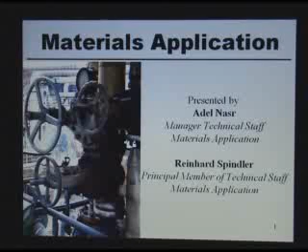Today we're going to present what we do in materials application. The presenters are myself and Reinhard, and I'm going to talk about the following subjects.

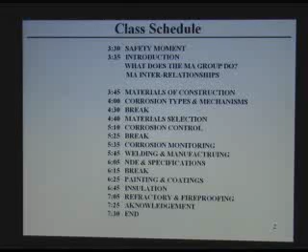The schedule of this presentation: we start with a safety moment, then introduction to what we do, our relation with other departments in the company, materials of construction, corrosion types and mechanisms, and then we take a break. After that, material selection, corrosion control, corrosion monitoring, welding manufacturing, non-destructive testing, and what specifications we prepare.

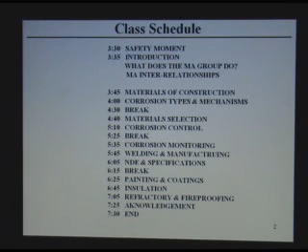Then we switch to Reinhard, and he will present painting, coating, insulation, refractory, and fireproofing. We end at 7:30.

The safety moment: this incident happened in 1984 in Chicago, one of the refineries. This was an amine absorber, a high pressure amine absorber, commissioned in 1970. From 1970 to '74, they noticed...

...hydrogen blistering in this course of the vessel, and then they decided to replace it. The section was replaced at that time and put back in service, but they didn't do any heat treatment, just welded it back to the other sections.

Subsequently they did several inspections but didn't notice anything. In 1984, about 10 years afterwards, they noticed a little hissing leak. They tried to approach the vessel, and soon after, the top section propelled and flew about 1 kilometer, 0.6 miles from that spot, and 17 people were killed because of this incident.

Investigation of this incident indicated that cracking had happened adjacent to the welding that was done, and it was very hard welds. The cause of failure was determined to be hydrogen-induced cracking. This created a lot of scare all over the world, and refineries paid a lot of attention to this mechanism of corrosion and what to do about it.

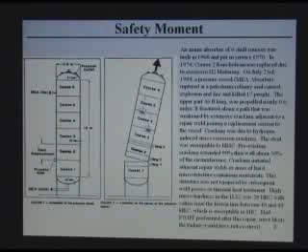Since then, a lot of development and knowledge has happened that helped industry avoid such incidents. The main point of this safety moment is that had this been done properly, if they knew that, this incident wouldn't have happened, and these 17 people would not have been killed. That is the main point of this safety moment.

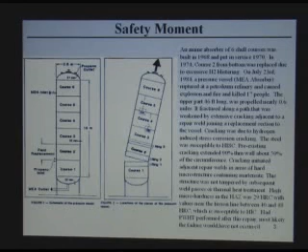Next item: what we do in our group is material selection, corrosion prevention and monitoring with different methods I'm going to talk about. We do welding control on specifications and manufacturing, dealing with vendors on their problems and trying to solve them.

We specify non-destructive testing as needed for prevention of corrosion incidents and damage. We also get involved in coatings, insulation, refractory, fireproofing, providing specifications and handling these issues with the project. We prepare specifications if needed, otherwise we use client specifications for those items.

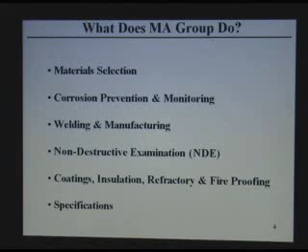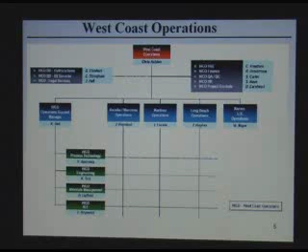Our location: we are in the mechanical group, which is part of engineering, which is part of operations support, which is part of the larger organization. Within mechanical engineering, we are part of materials application.

We deal with almost everybody in the department, with all the mechanical engineering disciplines. We check their data sheets for material requirements, insulation, and coatings. We get information from process people to develop material selection, and we deal with piping, instrument, and structural engineering, reviewing their welding documents and material selection.

We deal with project management, giving them our deliverables and progress, and with project control for progress updates. We deal with quality control—whenever they have an NCR or a fabrication problem, they refer it to us so we can review it and give our opinion on how to resolve it. We also deal with document control, who provide us documents to review and we return them.

We deal with procurement—when they go buy equipment, there are a lot of requirements, and if they have questions they come back to us. We also deal with construction sites where they have problems with fabrication, wrong material use, or welding problems; they come back and ask us.

We help the Martinez office, Shell Martinez, Tesoro, Wilmington, Long Beach, Houston, Reading, and Calgary offices. Sometimes we also deal with the London office on an as-needed basis.

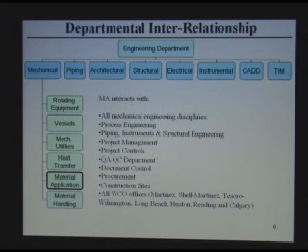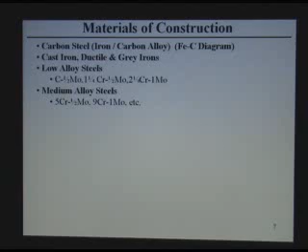Materials of construction used in the oil and gas industry as well as in the chemical industry are listed in this slide. Of course, carbon steel is a predominant material. I'm attaching here

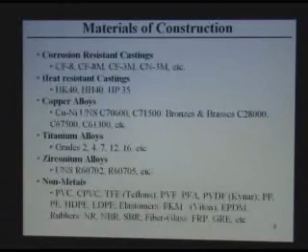I'm not going to go over all these items, but we have alloys which give strength and resistance to hydrogen corrosion. We have other alloys with more chrome, which gives resistance to sulfide corrosion. Of course, stainless steels have different grades and different applications.

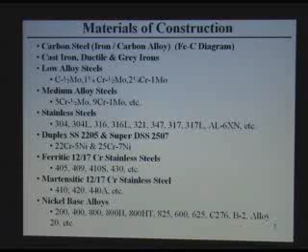Ferritic steels are predominantly 12% chromium or 17% chromium. They're used for trays and maybe some parts of rotating equipment. There's also martensitic chrome steels, which have a higher carbon content. They're not easy to weld, but they're good for high strength properties.

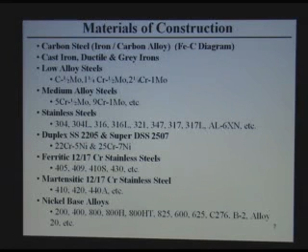We also use nickel alloys for high temperature applications and very corrosive applications. These cast alloys are also used for corrosion resistance in different pumps, where you have, for example, sour water service or sulfuric acid type service.

Heat resistant casting is used in reformer heaters and steam reformers, or ammonia plants and ethylene plants. Copper alloy is used predominantly in seawater type service, heat exchangers, coolers, condensers, and some brass is used in some coolers.

Titanium alloys are very resistant to corrosion and used a lot in refineries and sour water type systems. There are different grades, and basically it's almost 100% titanium with a little bit of alloying elements like palladium. Zirconium is a very expensive material, rarely used in refineries or petrochemical plants, but it is one option we have.

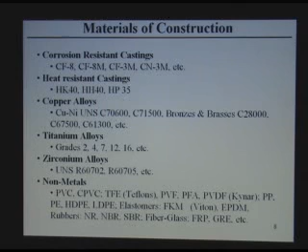We also specify non-metals, like PVC, all kinds of Teflon, Kynar, and rubbers and elastomers. These are used in equipment, for lining, sometimes for pipes. You can use non-metallic pipes.

The other mechanism is electrochemical corrosion. It is a reaction between the environment and the metal, but it occurs on two sides. The metal goes into solution, becomes ionic, and leaves electrons on the metal surface. The electrons go through a metal conductor to the cathode, where they neutralize hydrogen or oxygen, and this is a circuit of reaction, continuous like that. So the metal is always corroding, actually going into solution, and its electrons complete the circuit of corrosion. This is what they call electrochemical reaction.

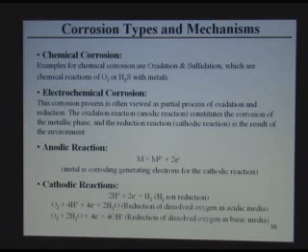There are many common mechanisms of corrosion in the refinery, and we have to be aware of them, because otherwise we make improper material selection. I'm just putting them alphabetically, not in order of importance.

Amine corrosion is very critical in amine units, which we are involved in too much. Ammonium bisulfide corrosion is in hydrotreaters and hydrocrackers. Ammonium chloride corrosion also occurs in hydrotreaters and reformers. Atmospheric corrosion is all around, especially critical near oceans and sea fronts. Boiler feed water and condensate corrosion is a problem too in a boiler plant.

Carburization occurs in reformer heaters. Caustic corrosion happens if you use caustic at relatively high temperature, not very high. CO2 corrosion is very important in jobs we do in Alaska, for the North Slope - it's a predominant corrosion mechanism we have to take care of. Cooling water corrosion, if the cooling water is not treated properly, can cause severe corrosion.

Corrosion under insulation happens because insulation can trap water behind it, and corrosion occurs under the insulation where nobody notices, leading to severe corrosion, leaks, and maybe disasters. Erosion corrosion occurs when you have stream velocity and corrosion at the same time, which can accelerate the corrosion mechanism - they call it erosion corrosion.

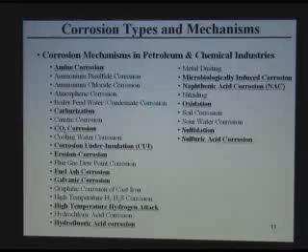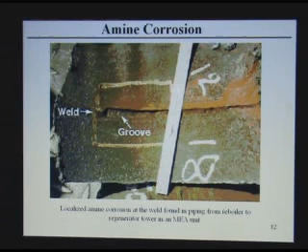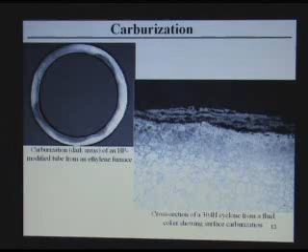Now I'll give you examples with photos of the results. This is a result of amine corrosion - you can see the corrosion here. This is a result of carburization - we see the furnace tube where carbon diffuses into the metal and makes iron carbides. You actually lose the metal that holds the pressure, and eventually you have only iron carbide, which is no good.

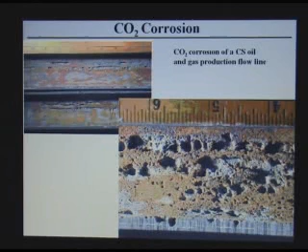This is wet CO2 corrosion, which is very characteristic - you have deep, sharp pittings, and this is what happens with wet CO2 corrosion.

This is under-insulation corrosion. And see what happened under the insulation.

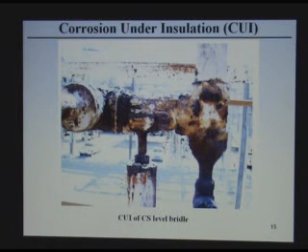This is erosion corrosion, where you see the effect of flow - the flow impinges on the metal, accelerating the corrosion, and that's why they call it erosion corrosion. If you have a weld, it also acts like an obstruction in the flow, causing localized corrosion here.

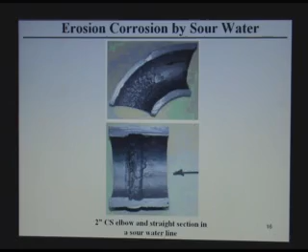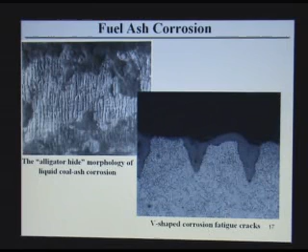This is ash corrosion, which comes from fuel oil burned in a heater. It forms something like a ceramic deposit, but it attacks the metal, and the metal gets lost.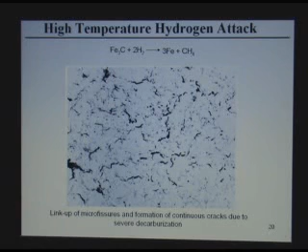As the pressure builds up inside the crystal, it starts breaking, and you see the fissures inside the metal. This is what they call hydrogen attack. This is again hydrogen attack - this is a regular structure, but you can see the fissures here from hydrogen attack, and eventually it shatters and breaks out.

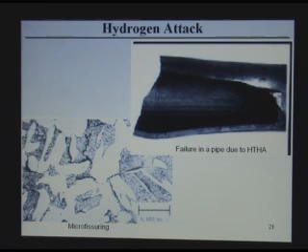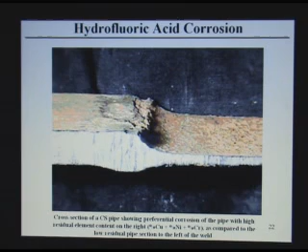This is hydrofluoric acid corrosion. Hydrofluoric acid attacks certain metals vigorously - if you have copper, nickel, chrome, it attacks. This carbon steel has some of these alloys inside, so hydrofluoric acid attacked this part. This one didn't have these impurities, so it didn't attack it.

Microbial corrosion - under a colony of microbes, you have this acid formed or some aggressive compound forms and causes localized corrosion.

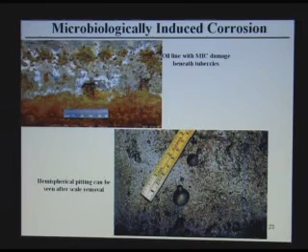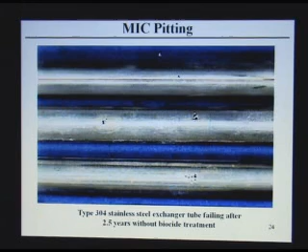And alloy - some microbes, they like to eat nickel, and corrosion starts from inside, and you end up with a pinhole, like in a stainless steel tube in a heat exchanger. So you end up with holes, and the rest of the pipe is sound, but where the colony was there, the corrosion occurred. This is corrosion by naphthenic acid.

Naphthenic acid forms some very loose corrosion product, and if you have flow or impingement, it goes very fast, and this is typical for naphthenic acid corrosion enhanced by stream flow.

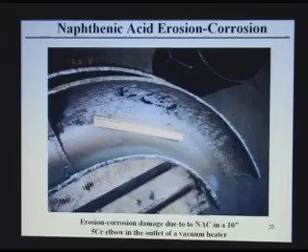The naphthenic acid corrosion resistance - I found this interesting - is determined by molybdenum content. The more molybdenum, the more the material is resistant. Of course, these are not resistant at all, with a very small amount of molybdenum. These materials don't have moly, very little here, and these don't have moly.

Then you start getting resistance with 316, which has between 2 and 3% moly. 317 has 3 to 4% moly. So these are the materials normally used for naphthenic acid corrosion, and predominantly we are using 317 now because 316 has moly close to 2%, which was no good. So we try to use 317 nowadays.

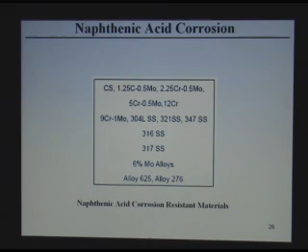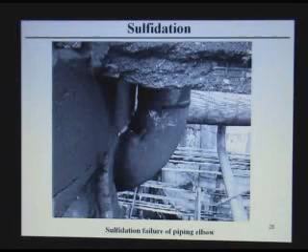This is an example of a hole resulting from sulfidation inside a stream. Here it was like tubes where you have sulfuric acid, and there's a crevice between the baffle and the tube. The corrosion occurred in this location.

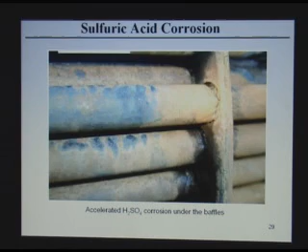Am I speaking too fast, or is it okay? Slow down? Okay, because we have a lot of material to present, and I'm afraid that... okay.

Types of corrosion - cracking. The ones I mentioned before were mostly corrosion metal loss type, but here we're talking about cracking.

As I mentioned before, we have amine stress corrosion cracking, which happens for carbon steel at certain temperatures if you don't hit stress relief. Ammonia also creates stress corrosion cracking for copper alloys, so we never use copper alloy if a stream has ammonia in it - we cannot use it, otherwise it will crack.

Carbonate cracking also occurs - we have a high carbonate content at high temperatures and high pH, and the carbonate ion can cause stress corrosion cracking. Caustic can also cause stress corrosion cracking for carbon steel if it is not stress relieved.

Chloride cracking, of course, with stainless steel, which I showed you - I'll show you some figures. Corrosion fatigue - if you have a fatigue environment and corrosive environment, it causes corrosion fatigue.

High temperature hydrogen attack, which you have seen a few minutes ago. Hydrogen embrittlement - this hydrogen, as it diffuses at high temperature inside the metal, gets trapped inside the metal, and the metal loses ductility and becomes brittle.

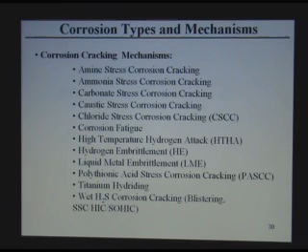Some examples, this is an amine crack next to a weld, and it is predominantly intergranular. If you have this structure, you have the intergranular crack.

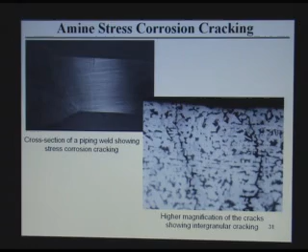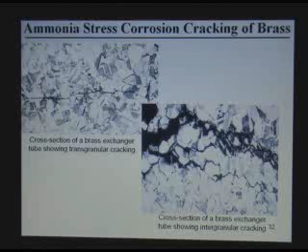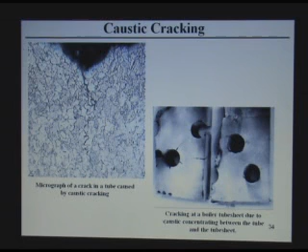This caustic cracking looks like in a boiler or somewhere. You have the tubes rolled in, have high stress, and you have caustic entrapment here, and it cracks carbon steel, as you can see. This is another example of caustic cracking.

This is the stress corrosion cracking by chlorides, and it is typical. If you see a branched crack like that, it's 100% due to chloride cracking. And you see how it is transgranular.

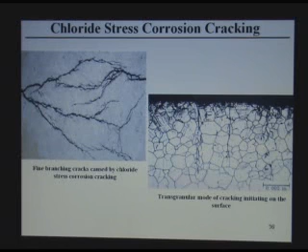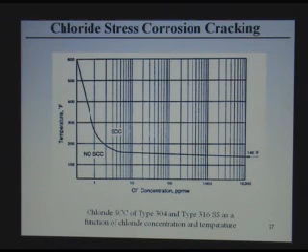There is a theory: if your temperature is below 140, chloride cracking is a function of concentration of chlorides and temperature. And they found in some cases, if you are below 140, stress corrosion cracking will not happen irrespective of the concentration. But you should never take this for granted. You have to analyze what is in the environment. You have to be careful not to apply this blindly.

Liquid metal embrittlement, this is an example where I think galvanized metal came in and attacked the carbon steel and stainless steel, and cracks it all the way.

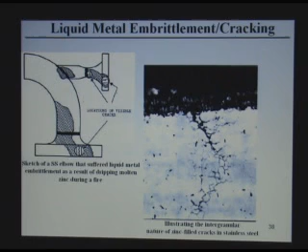Polythionic acid cracking is a phenomena where stainless steel, made of alloy, when it has some carbon, carbon diffuses into the grain boundaries and forms chromium carbides. And if you have areas rich in chromium carbides and adjacent areas less in chromium, you have a galvanic cell here. And if the conditions are wet during shutdown time, corrosion occurs at the grain boundaries. And in case of thermal stress, there is no bond anymore, so it cracks around the grain boundaries.

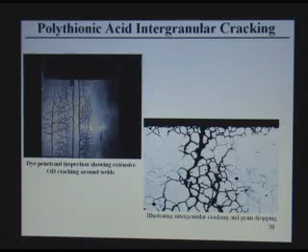This is another example of polythionic cracking. The sulfide types of wet H2S cracking.

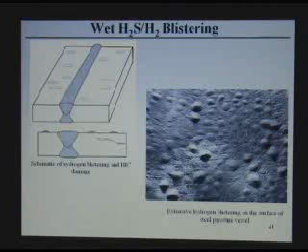This is the first one, blistering. Hydrogen from corrosion diffuses into the metal, accumulates, and causes blistering of the surface. So this is one area of accumulation of hydrogen, another area of accumulation of hydrogen, and it interconnects this way, and they call it hydrogen-induced cracking. This one is blistering. You can see the blisters here, and it doesn't show cracking, but only blistering here.

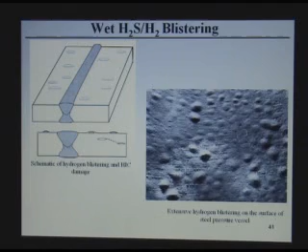Hydrogen also, sulfides from the H2S can cause sulfide stress corrosion cracking. This is a function of the hardness of the steel. That's why we always recommend a maximum of 200 Brinell, and we require stress relief of carbon steel to avoid having high stresses and hardnesses, to avoid this mechanism of sulfide stress corrosion cracking.

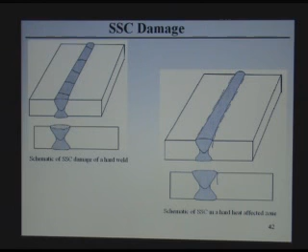There's another way, here is another sulfide stress corrosion cracking in the heat affected zone. This is a stepwise cracking, the hydrogen-induced cracking, where cracks occur in the metal.

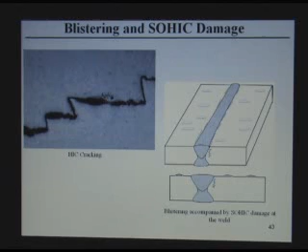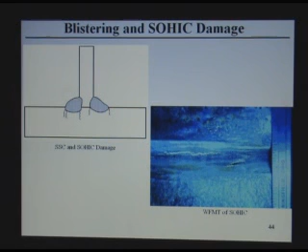And if the cracks propagate perpendicularly this way, they call it SOHIC, stress-oriented hydrogen-induced cracking. This is an example of sulfide cracking and stress-oriented hydrogen cracking. The techniques now to find out such mechanisms during shutdowns use wet fluorescent magnetic particle testing, which is very sensitive and can find cracks in the heat-affected zone of welds.

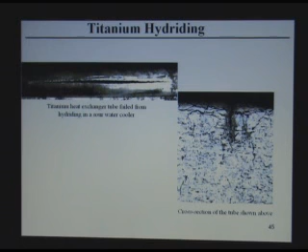Titanium hydriding: hydrogen goes into the metal and makes it brittle, and you end up with a crack all the way through a tube, and this is how it looks in the microstructure.

There are other methods of mechanism of damage and causing failure, like cavitation, which we see in pumps and control valves. If you have vacuum, what happens?